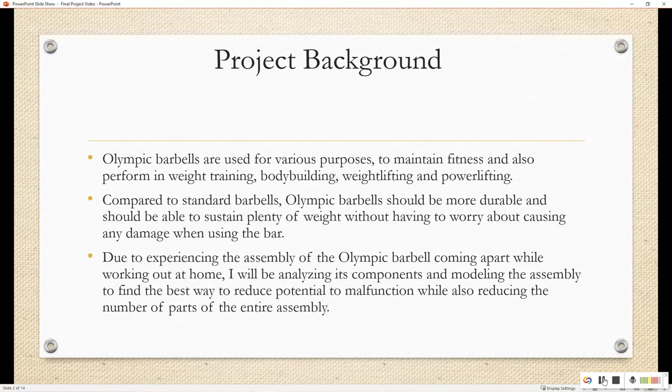I've only shown one of each because the other side is pretty much the same. I'm just doing one side so it's a little easier to understand.

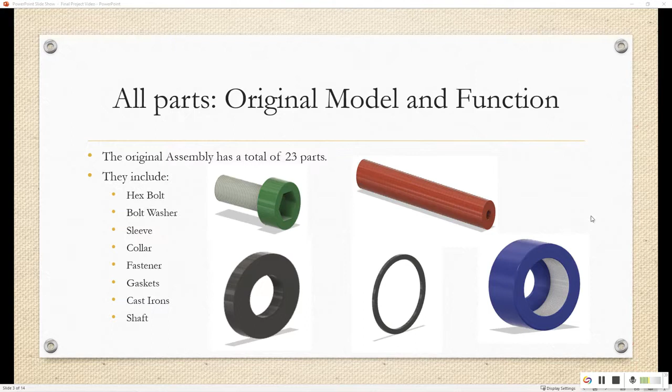The other parts that make up the entire assembly, as I said, include the fastener that goes in on top of the shaft, with three cast irons that go on top of the shaft under the sleeve, and two gaskets that protect the cast irons from making contact with the collar.

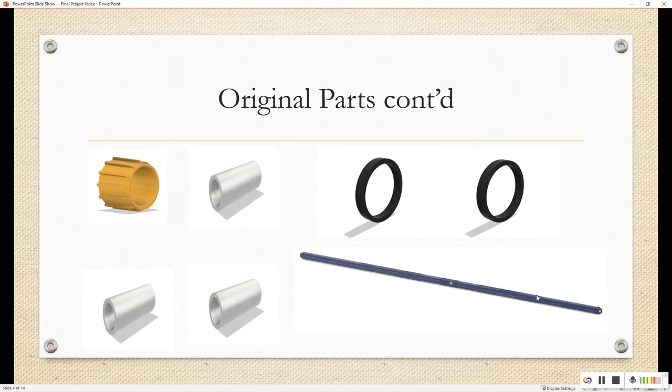Once the shaft goes into the sleeve, we can see that the bolt attaches to the shaft itself, causing it to pretty much stay in place.

The reason why I chose this project, like I said earlier, was because inside the collar there are threads that screw onto the sleeve, and over time those threads came loose and fell out. The collar slid off to the left and caused all the plates on the sleeve to fall out, making me drop everything right there where I was at.

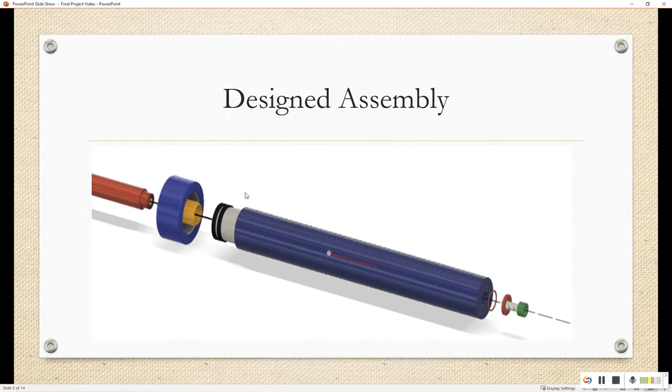In order to improve the assembly of the sleeve, I decided to make a manufacturing plan. Using the manufacturing program in Autodesk software, the stainless steel stock will undergo several phases using machine tools such as turning, drilling, facing, profile roughing, grooving, and profile finishing.

Once the sleeve has been machined down to its proper dimensions, an NC program was created to generate a G-code for the proper operations, which we will see in the next few slides. But first, I want to show you a video I recorded a little bit ago where the sleeve is undergoing the machining process.

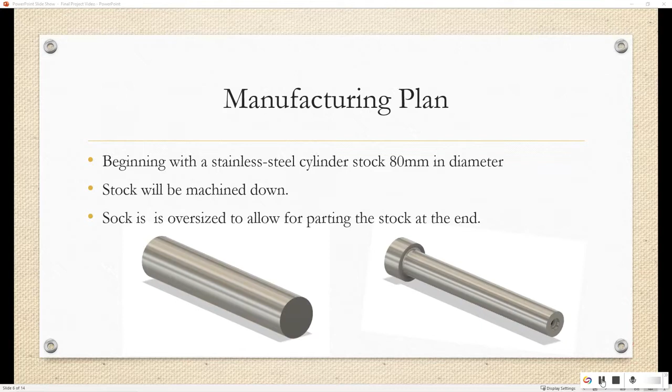First it starts with turning of the stock. The stock first undergoes facing to get a clean cut at the end of the stock.

Then we can see where it undergoes profile roughing, which is what it's doing right now, with a few passes to trim the stock down to an offset of 1 millimeter of the sleeve.

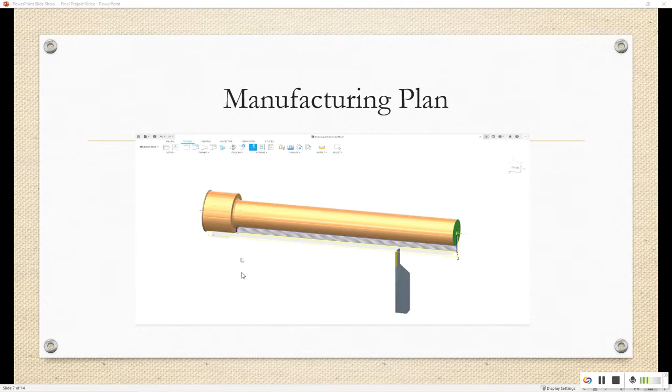After it has roughed down the stock to its proper dimensions of the sleeve, I use the profile finishing tool to cut the final turn of the stock.

Once the stock is ready with its proper dimensions, the grooving tool was used to part the sleeve from the unwanted stock. After the sleeve has undergone all the turning tools, I use the drill in horizontal position to drill the holes for the shaft on one end and the hex bolt on the other end.

I will show the video here one more time.

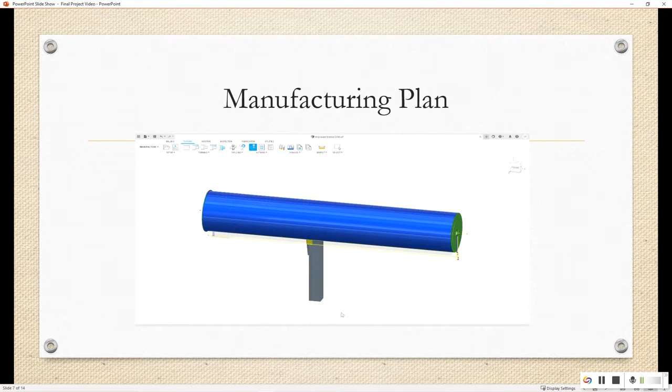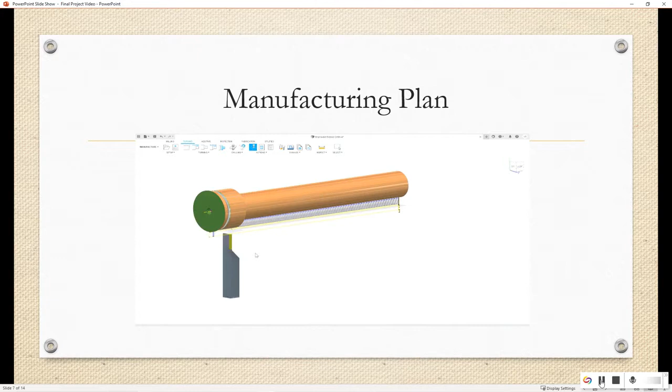This is all the profile roughing right here, and then that's the finishing. That's the grooving, and then the milling part comes in to drill the holes on each side of the sleeve.

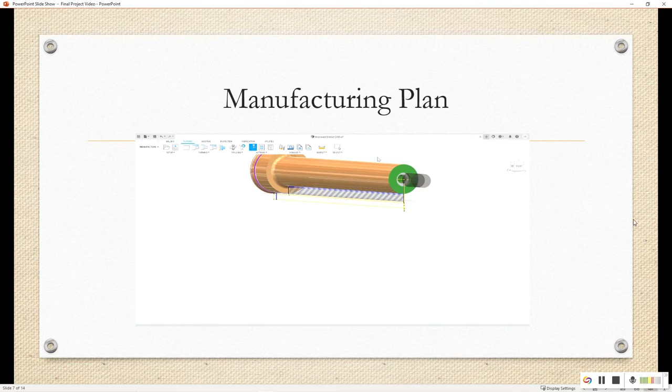Once I got all that prepared, I obtained the G-code from the NC program, which was created and processed.

Now getting into the design for assembly section, this whole project is based off of this DFA to minimize part count, to incorporate multiple functions into single parts, to make parts easy to identify, and mainly to reduce the parts that it takes to assemble the product.

By doing all of this, it allows to increase cost savings, because it allows for less time to be produced and less parts to use to be produced.

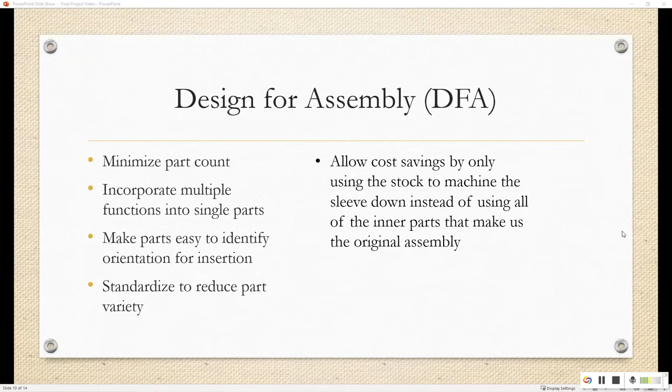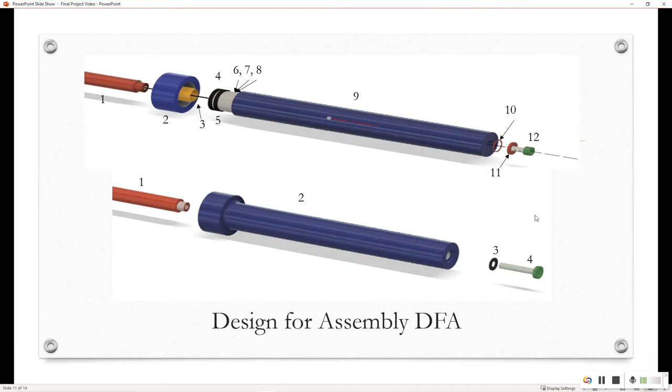As we can see here, the shaft was modified to have threads on the end to be able to screw in the sleeve, while also securing both of them with this hex bolt, which will go here just like in the original assembly.

No parts were modified as far as size and thickness. Everything stayed the same. All I wanted to do was reduce the number of parts and make it a little bit more secure so the sleeve won't come apart.

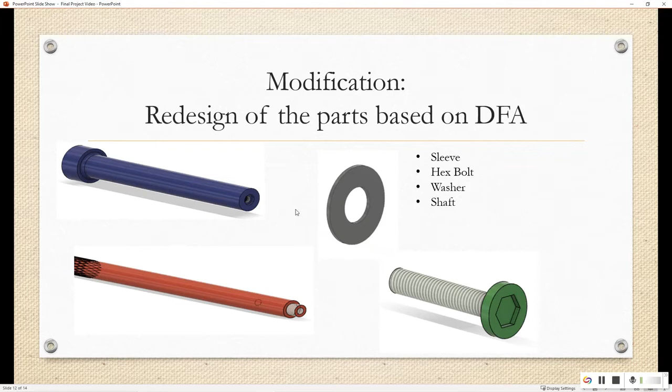So this whole Olympic barbell assembly, I showed how it malfunctioned on me and how I used the design for assembly to improve the design and how it eliminated the risk of any future failures or malfunctions.

And like I said, no changes to the dimensions were done. In regards to that, the purpose of the Olympic barbell was not compromised. Since everything stayed the same, we just reduced the number of parts inside the assembly.

After implementing design for assembly, the number of parts to assemble reduces, which causes less cost and less time to make. So that increases cost savings.

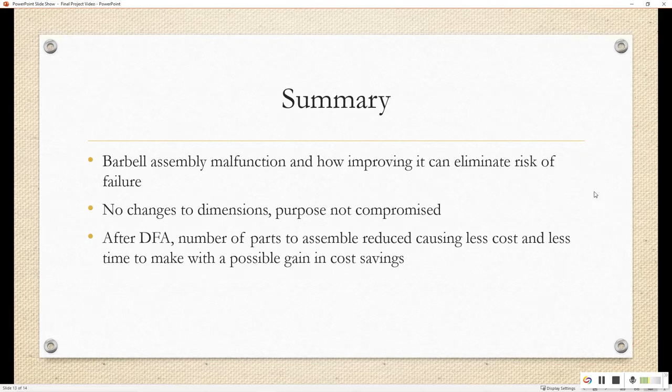So now I'll be demonstrating the entire assembly in Fusion 360. I'm going to be demonstrating here the original assembly of the Olympic barbell, and we'll get to the modified part here in just a second.

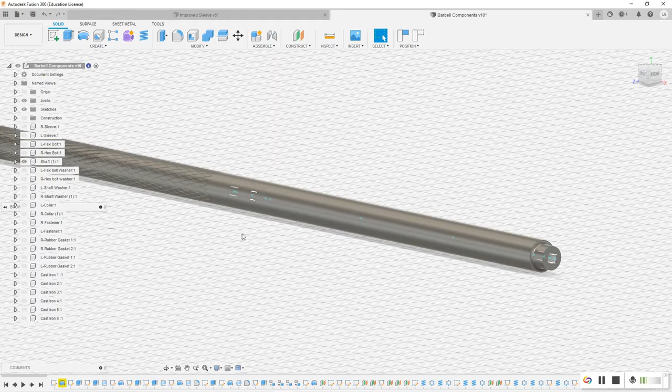So what I want to show you guys is how this whole assembly works. So we got the shaft here, which has a 7/16 hole with threads, so a bolt goes in there to be attached into the sleeve and pretty much keep the whole assembly in place.

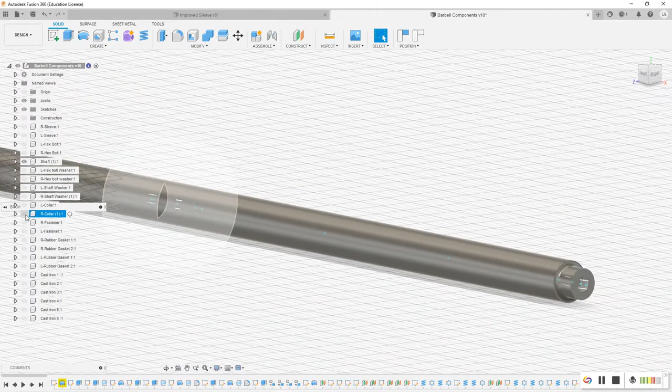So if we start here with the collar, you can see that it has threads, which is where the whole problem started with the sleeve coming off of the collar, causing this collar to just slide off and all the plates coming this way. And if we go into the individual parts, you can see the fastener that comes in and stops all these components from shifting towards the left.

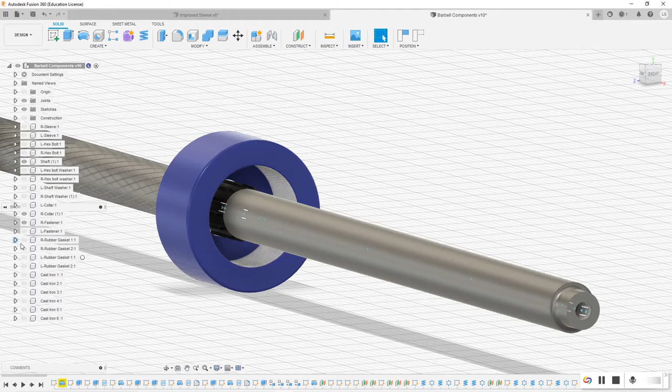And this here's your fastener, and you got two gaskets that protect the components inside here from these cast irons that go underneath the sleeve.

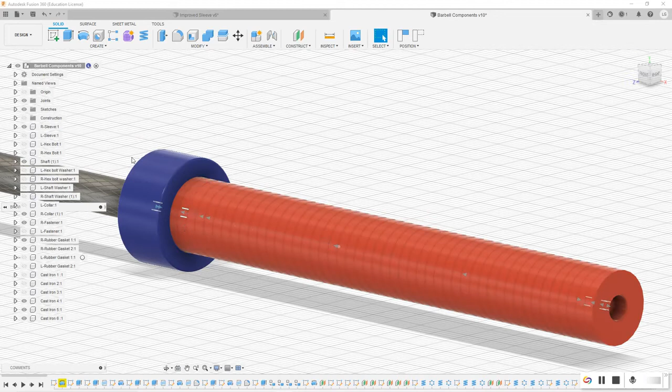And on top of these cast irons, we have the sleeve, which is screwed on to this collar right here. And you see here, the shaft comes into the sleeve, and we attach a washer with a bolt

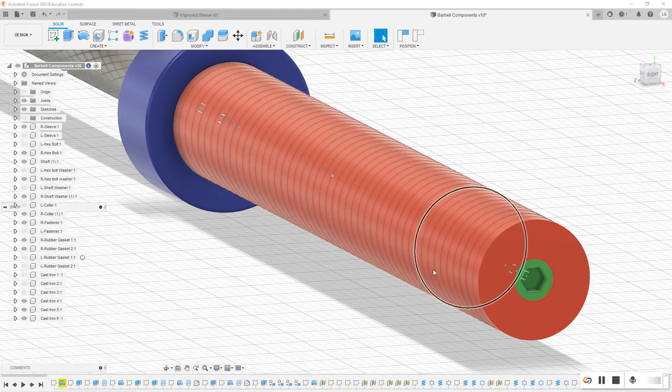and secures the whole thing here. That's what pretty much makes up the entire assembly.

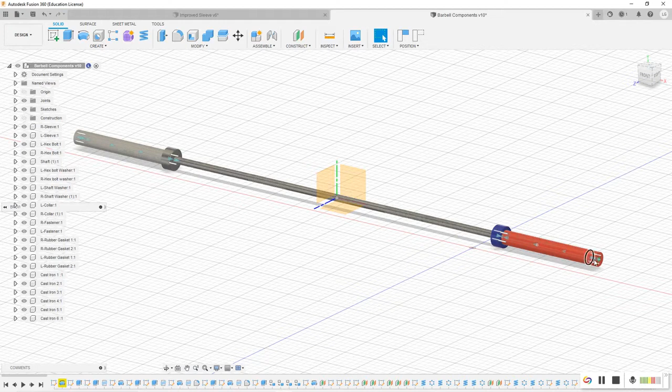So if I go and open all these up here, we can see the entire assembly all together. I have this in color so we can easily differentiate between each component. But over here is the actual physical material, which is stainless steel.

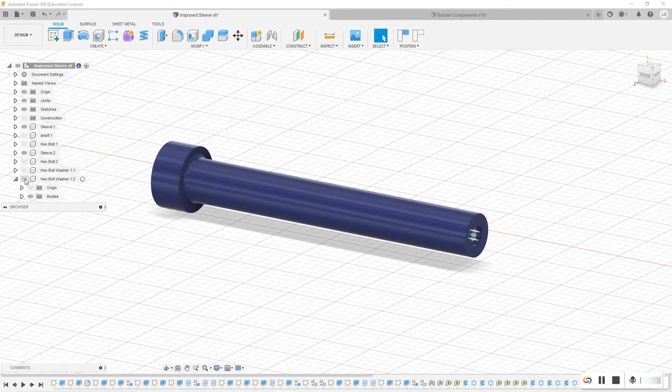And for the modified part, I have switched screens here. We can see here, it's better if we look at it as an individual part. You can see the sleeve here by itself.

So, as explained in the modified part section, I added some threads here at the end where it'll allow the shaft to go in from this side.

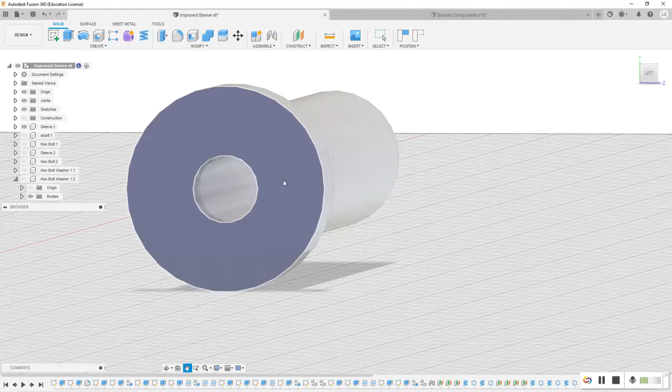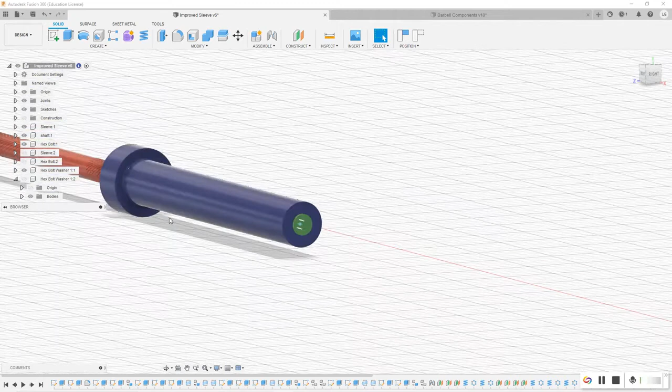And it will add more security here with these threads. Once it comes in here, we can go ahead and attach a washer and a bolt with it, pretty much eliminating all these parts that are underneath the sleeve.

So that makes up for the entire project. I showed the original assembly versus the modified assembly, where it allows the Olympic barbell to secure more weight and avoid any future risks. Thank you.